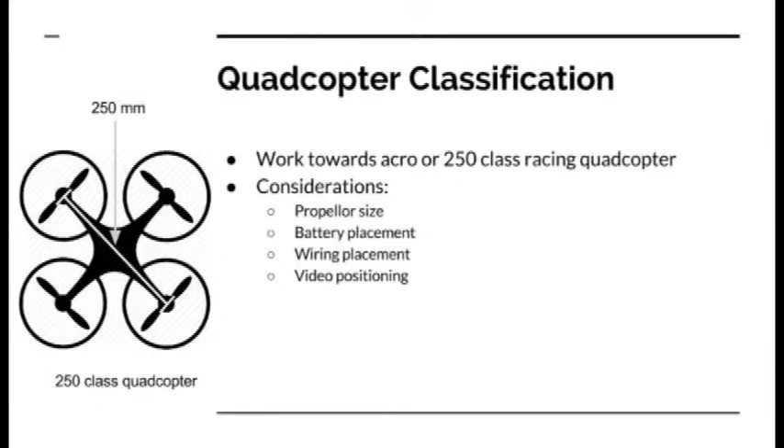We're going to be working on building an acro or a 250 class racing quad, because I think a very cool thing would be to have all of you guys have your own 250 class racing quads, and we can make our own FPV league through the Robotics Club. So a racing league, we can hopefully get sponsors, hopefully get courses that we can go on.

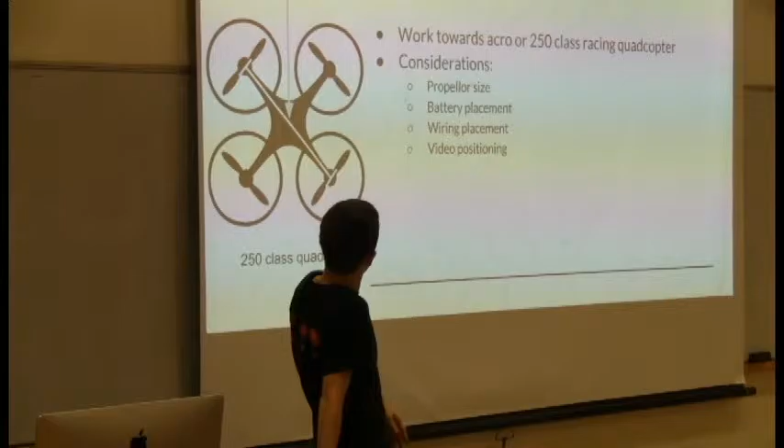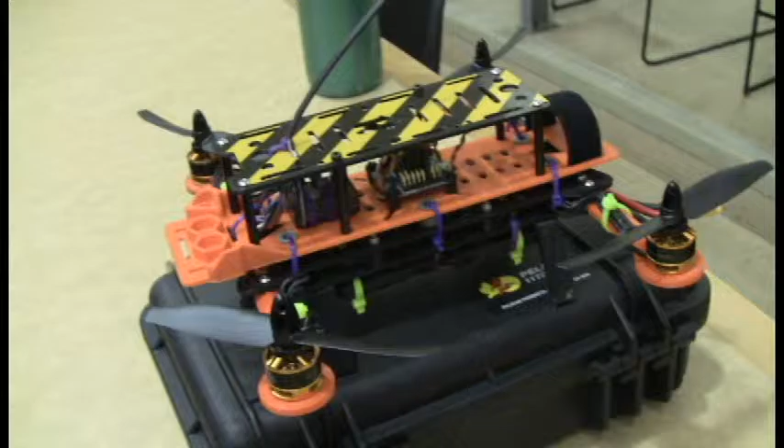That's the goal. A 250 class racing quad is defined as 250 millimeters across the diagonal from motor to motor. So that one, the orange one right there, you want to hold that one up? That's a quad Carl designed. He built it for about $200, and that is what a 250 class quad is.

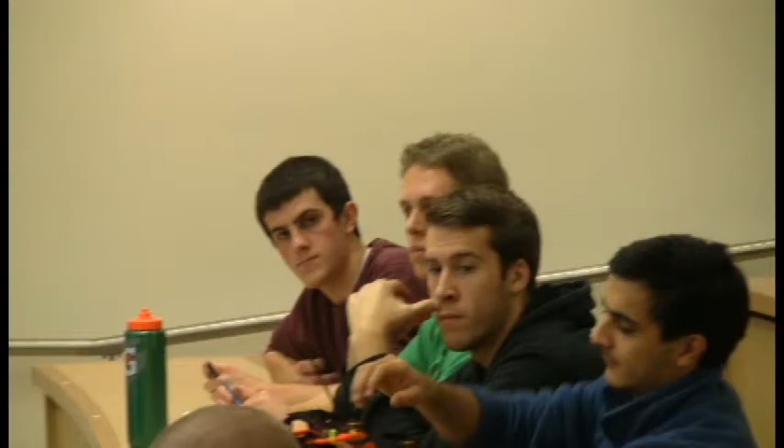They're going to be light, and they might not have as much power as, say, the octocopter over there, but they probably can get up and go.

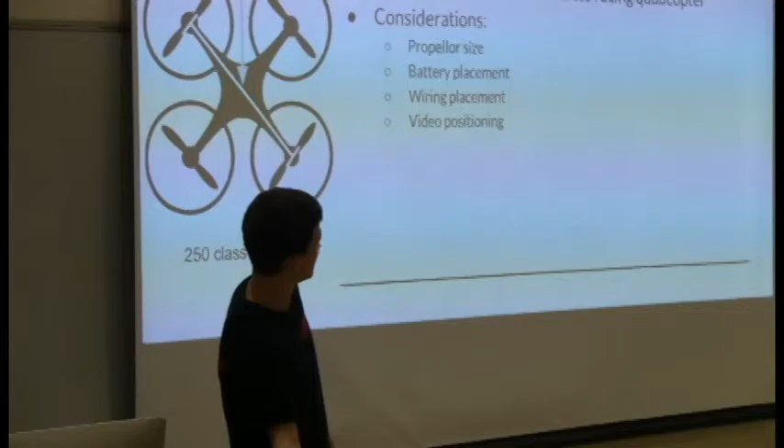Considerations you want to take into mind when you're building a frame: you want to take in mind how big your propellers are going to be. Those ones, Carl, what size are yours? 5-inch. So he has 5-inch propellers.

One of the mega quads we have in the club is 16-inch propellers. So you really need to consider what you're dealing with, what kind of beast you're dealing with.

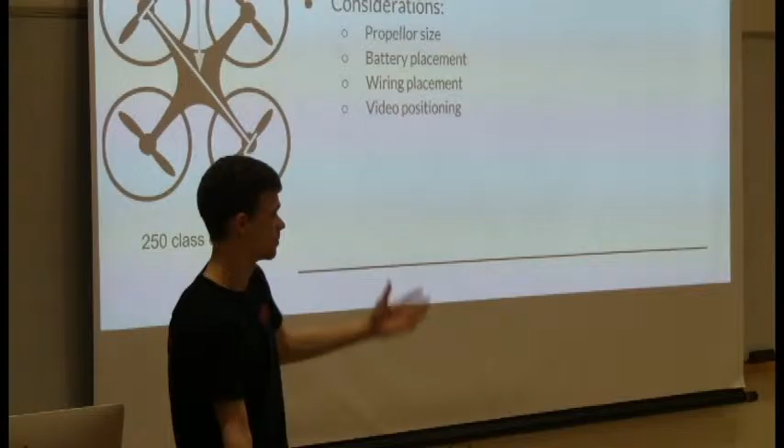Also, battery placement. Batteries tend to take up a lot of space, and you really have to make sure you know where your battery is going before you just make some random quadcopter on SolidWorks and print it out, and then have no idea where everything's going.

Wiring is a big thing. If you look at the octocopter in the front, you can see all of the wires are braided into the center, so that they don't get in the way of the spinning motors, and they don't get in the way of any other moving parts, so they don't get cut or any motors don't go out.

So you really want to take into account wiring placement. As an ME myself, usually I don't think of that because I'm building a frame, and it's brought me into some sticky situations before, so that's a big thing.

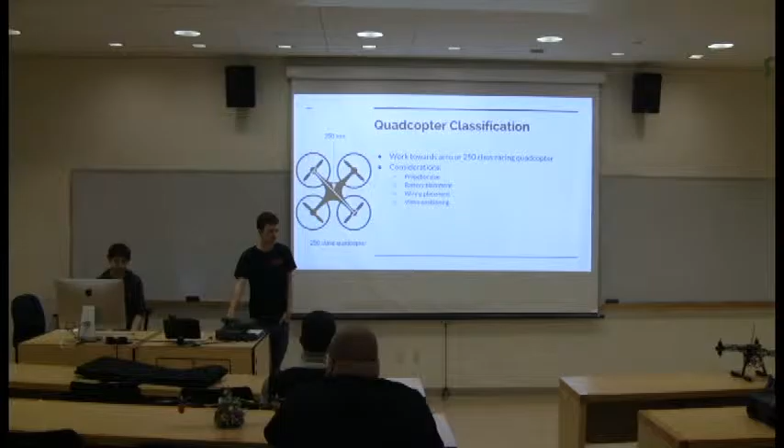And then also video positioning, where you want your video recorder when you're doing FPV, so that you can see everything in front of you and get a wide field of view. We'll also go into if you want to have it on a servo, so you can actually adjust the angle that you're seeing. Next slide.

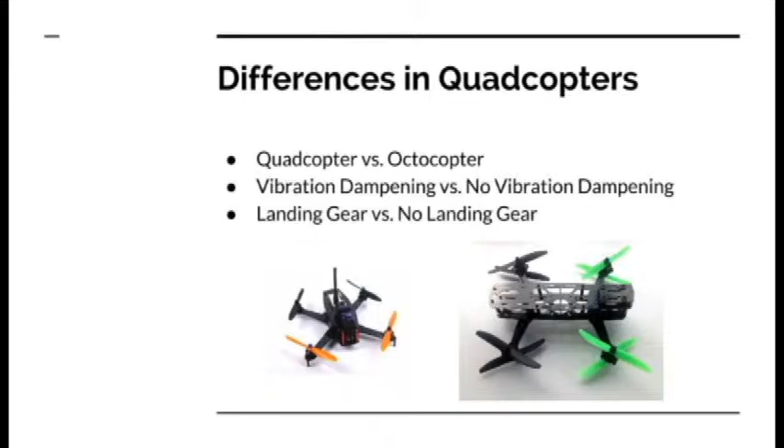So differences in racing quads: you can have a quadcopter or an octocopter. Those are typically the two types you're going with. A quadcopter is all the ones you kind of see in front of you for the most part, 4 rotors. The one that's in front of Josh and Sam, that's the octocopter.

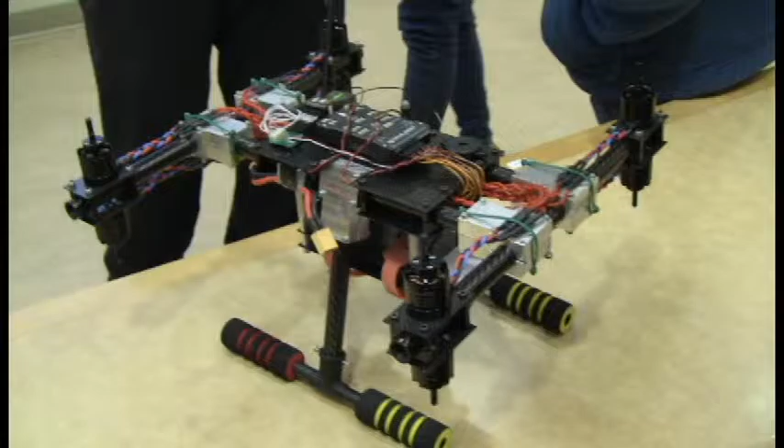If you look at it, it doesn't have the blades on it because it's going through some tuning right now, but it has motors on top and bottom. Really what you get from an octocopter is a lot more thrust, a lot more power, so you're going faster.

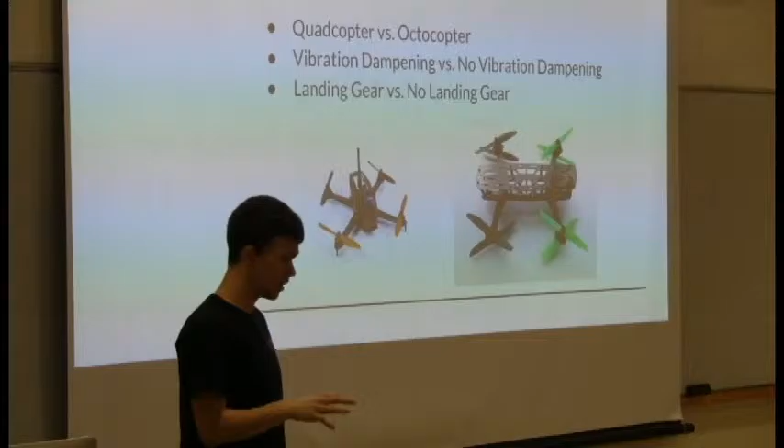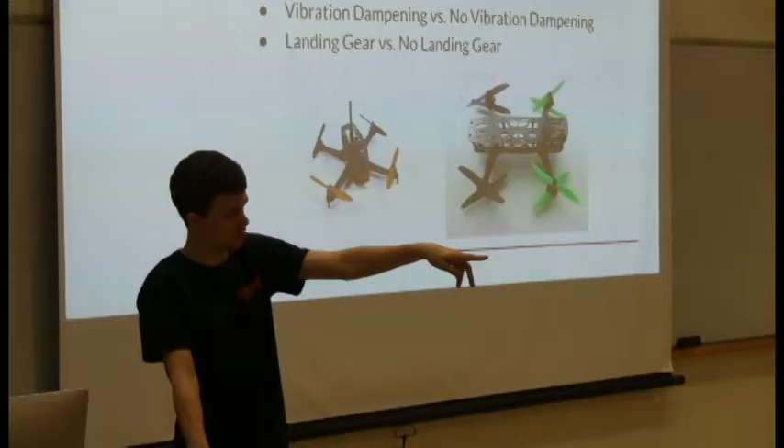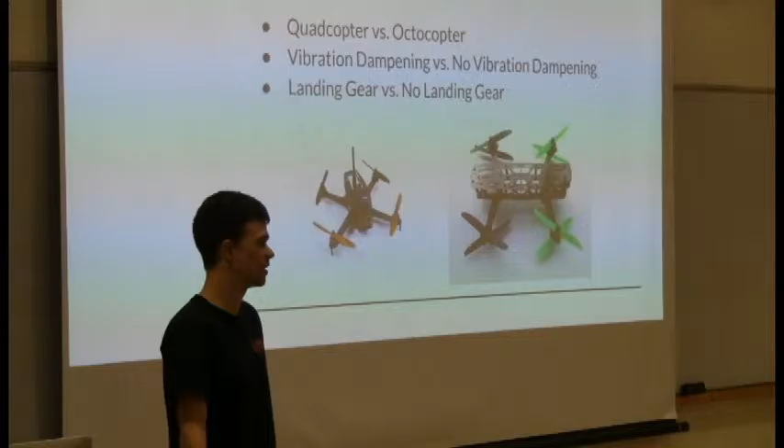But the trade-off is lower battery life, and it's expensive. Motors are a big investment when you're going into quads. The orange one, those motors cost about $60 for the 4 of them, so you're looking at about $15 per motor. If you go to octocopter, you're looking at a $60 increase. So really, one of the main themes you're going to see is you can do it, it's just going to cost you more money. That's really the thing, because there's a lot of off-the-shelf things you can buy.

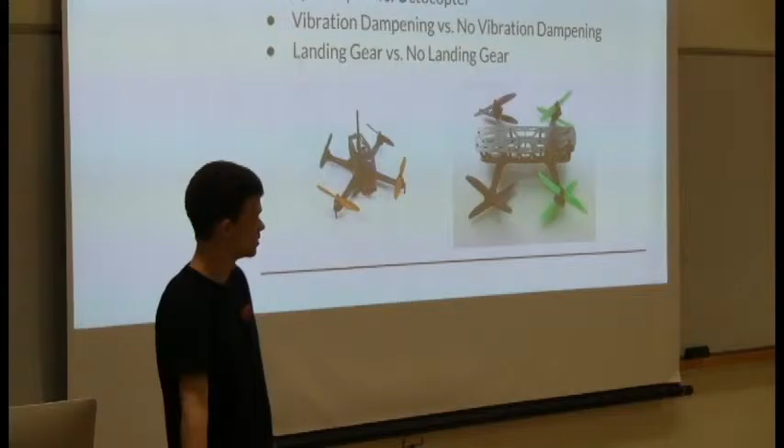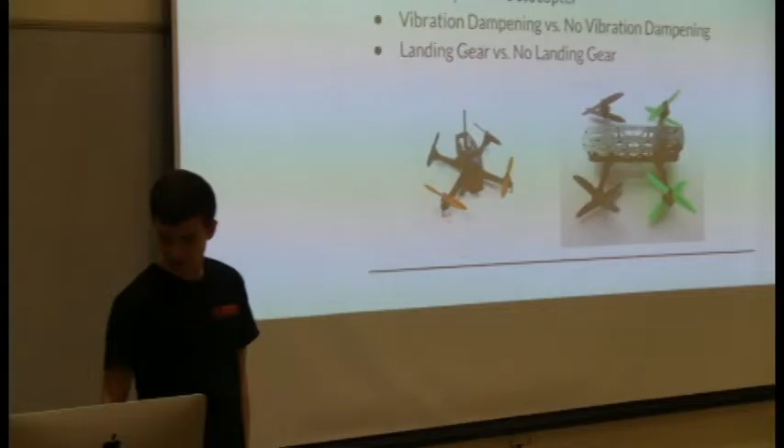The vibration dampening. Yeah, do you have a question? If we're going to race these, are we going to have two different leagues, a quad league and an octo league? Everything's in the same class. It's 250 class, right? Yeah.

So everything actually, the racing isn't a huge thing, but it's actually fairly new. It hasn't existed except for the last year or two because the technology hasn't existed. So everything exists in the same thing. The power trade-offs for having less battery life usually end up being equivalent, one half dozen of the other. It's more complex, obviously, to build an octorotor, but you trade that for more power with less battery life. Sometimes when you're racing, you need more battery life, so you get a bigger battery, and that weight is actually a trade-off between extra thrust because you're adding weight to the actual quad itself.

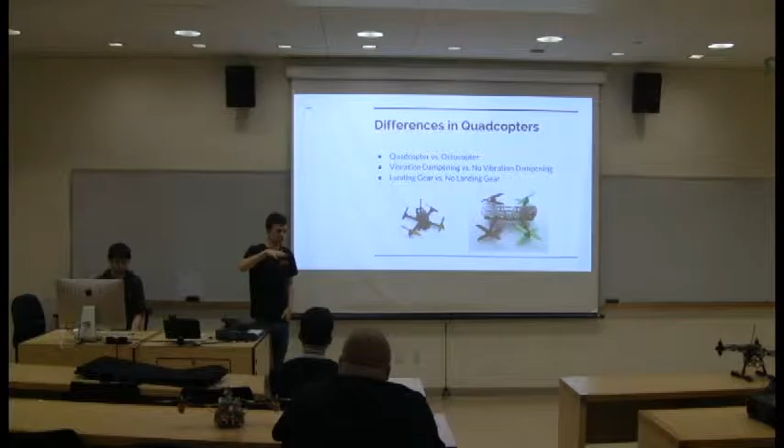Okay, cool, thanks. So vibration dampening - all these are flight controllers, and that's what flies the quad. That's what sends the signal to the motor, the ESC, to make them spin up. And when you're flying, and those rotors are spinning at really high RPMs, that flight controller experiences a lot of vibrations, and sometimes that'll tell it that it's not stable, or something to that effect.

So I'm going to keep pointing at the orange one because that's the kind of thing we're looking at. It has a vibration dampening plate, so if you want to just tap on the top of it very lightly, it has little vibration dampeners along it. You can do that, but also, Levi, you want to take note of what happens if you don't dampen it? As far as flight control? Basically, it just makes it harder for the sensor to record what's going on with the levels, and the levels are bouncing all over the place. So you lose a lot of the control, I guess, but you're still able to fly if you don't dampen it.

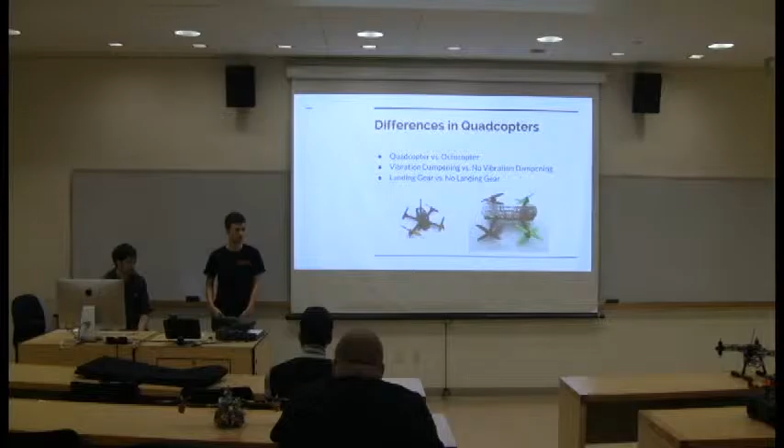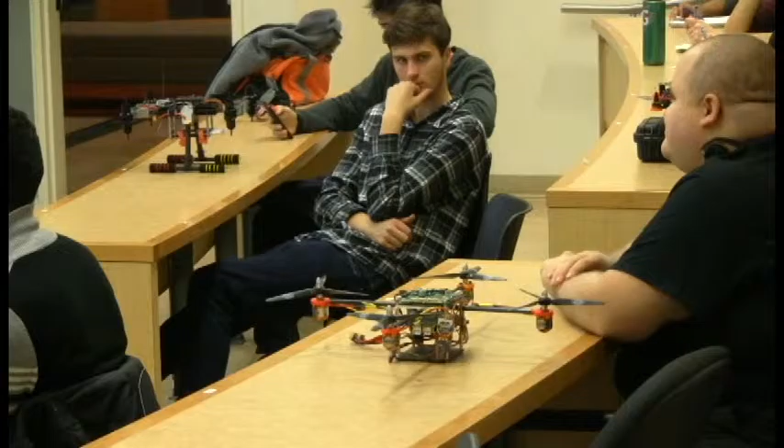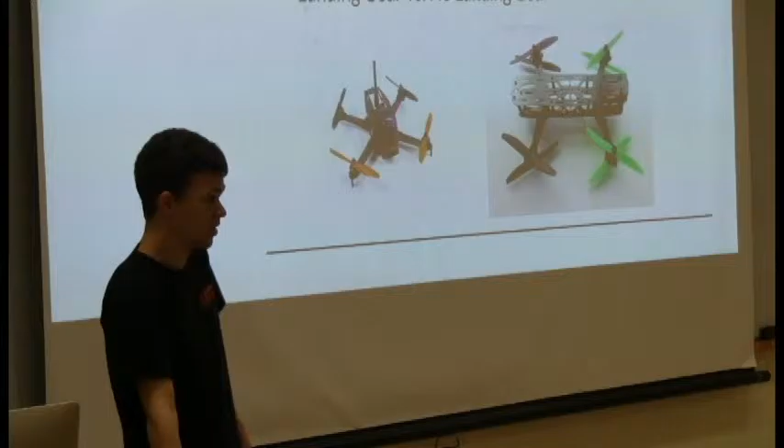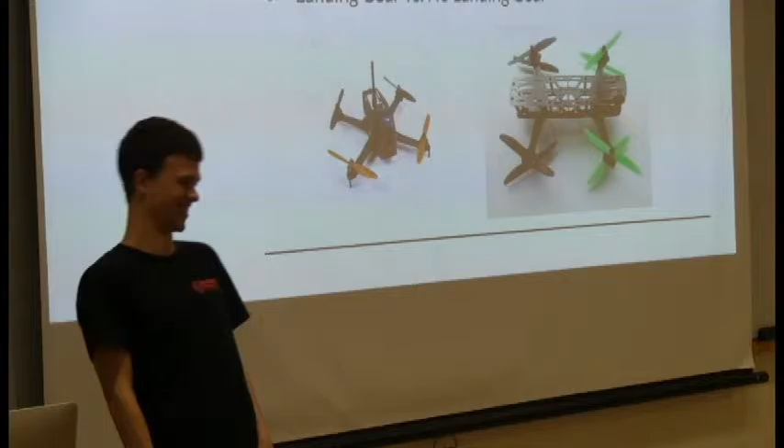And then also landing gear. I'm going to point you to this one over here. This has no landing gear. All you're doing is a long landing every time you land. The benefit of that is you're doing a racing quad - you're not really wanting to land it, right? You're trying to get around a course as fast as possible. So you might decide you don't need landing gear. Whereas if you look at the octa quad, they have the little 4-prong landing gear so that when you take it down for landing, you might not break any of the equipment. So when you're building your frame, you should consider: do I want landing gear, do I not want landing gear? What are the trade-offs if I decide not to have landing gear and I'm just bottom landing it every single time? Because I've seen that one flip a lot of times, and we've broken a lot of stuff on it because of that. But it's not also meant to race, so there's that.

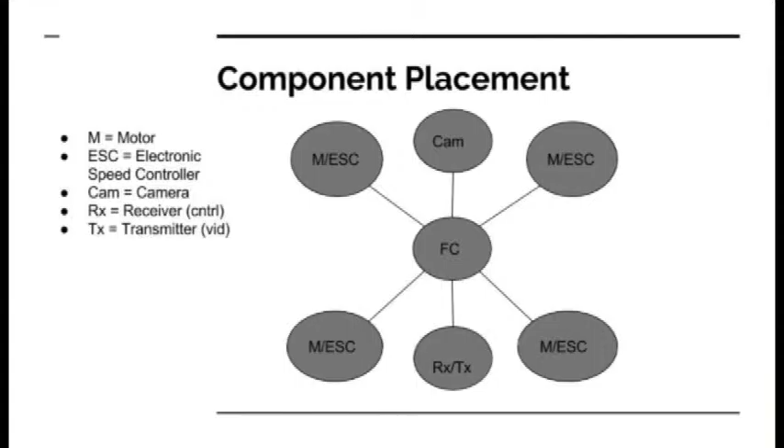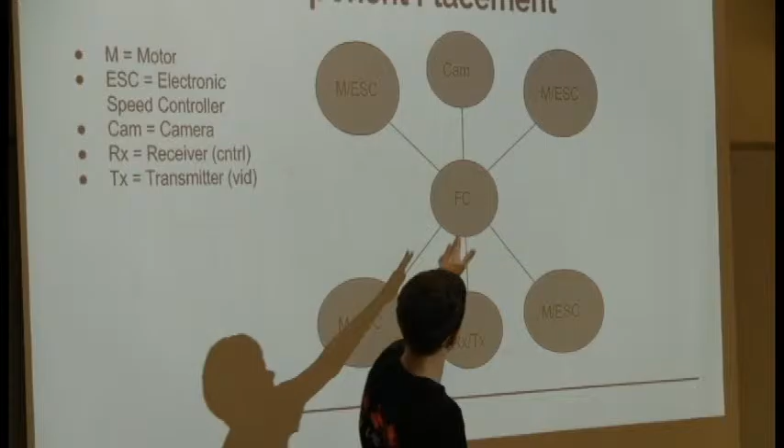Next slide. So then component placement. When you're designing your quad, you want to think about where all the components are going. I'm going to send out these PowerPoints over the members list, so you'll have these PowerPoints. This is basically all the main components you're going to be looking at. You're going to have your motors - this is your main center computer, the flight controller. Then it's going to go off to your 4 motors and your 4 ESCs. Then you're going to have your camera in the front, looking forward, and then usually your radio receiver and your video transmitter in the back.

So when you're designing your own custom quad, if you want to do that, I suggest doing a similar component placement diagram where you put down your flight controller, where that's going to be, and where your 4 motors or 8 motors, 4 ESCs or 8 ESCs are going to be. Then put down where your camera is going to be, where your transmitters are going to be, and where your battery is going to be.

I didn't include that in this, so that you really know what you're dealing with when you're building your quad. That way you're not going to get everything printed or receive it online after spending $40, $50 on it, and realize it's not what you thought it was, that it doesn't have these certain components.

So this is a very good - Levi was saying this is how you start most of your quads, isn't it? Yeah, generally just bubble diagram it out where I'm going to put everything, so I plan before I put the hole in and everything. So yeah, this is a very good starting point, I'd say. Go to the next one, you want to take this? All right.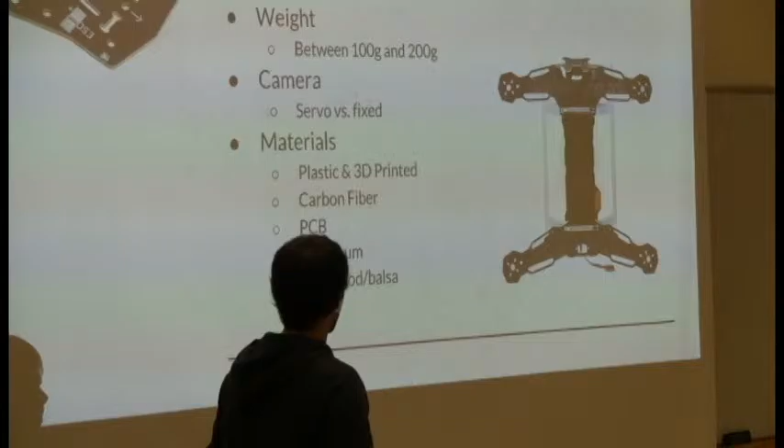Main thing to consider now is materials. You see we got the 5 main things that people are building out right now: plastic 3D printed, carbon fiber, PCB, which is pretty close to the same thing, aluminum, and then basswood and balsa.

And pros and cons of each of the different ones. Plastic 3D printed is inexpensive, most commercially available, got a lot of different replacement parts out there. Mid-range in weight and strength, and it's the only one that comes with a lot of flex, and that's usually a good thing when it comes to vibration dampening. So that's one thing to consider when you're looking into plastic or whatever.

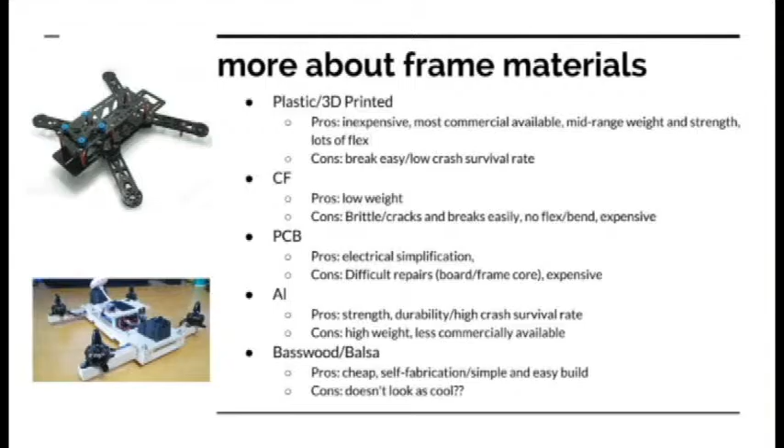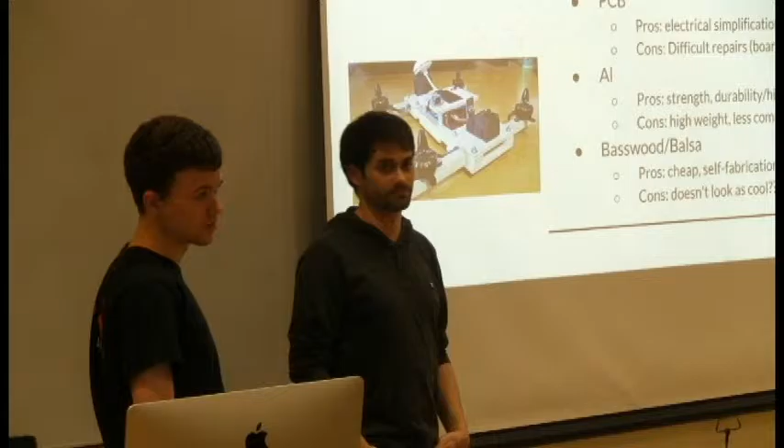Cons: breaks easy, low crash survival rate. I've crashed these things a lot of times, and the plastic ones snap right away. So the orange one over there, we were flying it a couple weeks ago, and someone flew it into a tree, and it fell down and broke 2 of those arms off. Carl has the model for that and just printed off two new arms and was able to use it to film some videos and stuff like a week later. So that's one of the benefits of doing a 3D printed frame - you can basically print your own replacement parts. You don't have to wait for more than a couple hours to get your stuff up and flying again.

Like those arms, you can 3D print at the library for about 50 cents, have about a day lead time. So if you break something, you're looking at getting back in there about a day for 50 cents, so it's not bad.

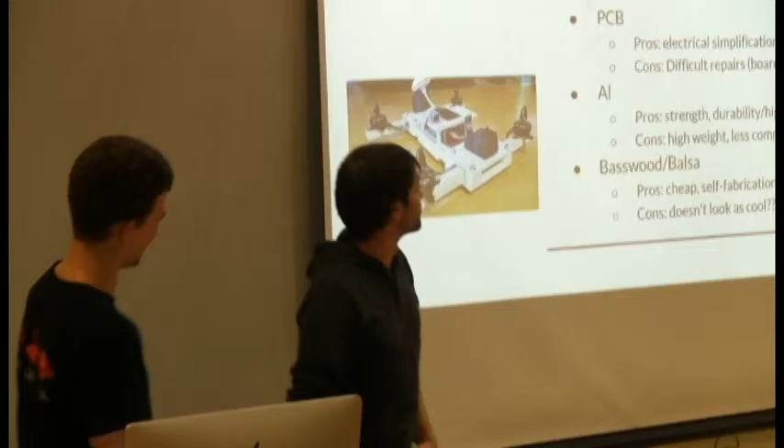Carbon fiber - low weight is the main pro of that one. Generally they make it thinner, so it's still a little bit brittle and breaks, and there's no flex really. Carbon fiber is usually expensive unless you're building it yourself. Like these frames, you buy them for like $20, but sometimes when you get carbon fiber, they run like 50 to 100.

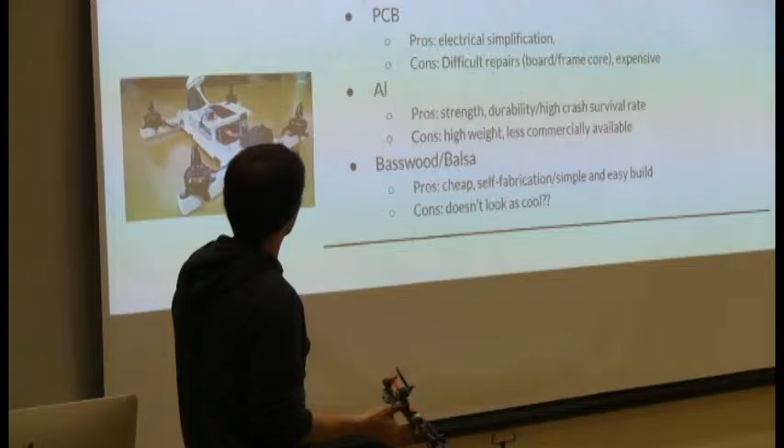So PCB, pretty much the same thing, it's electrically simple. One thing I would say is that they're difficult to repair. If you look at it, it's just one solid piece, and basically if anything breaks in here, the whole thing's trash. So just one thing to consider. But yeah, it's inexpensive - this one's like $12 for this frame, so it's not too bad.

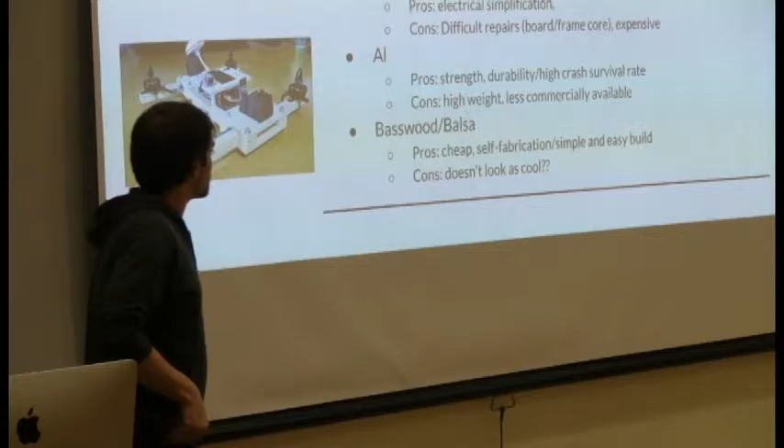Other than that, aluminum, there's not a whole lot out there. Basswood and balsa really is mostly just craft stuff, just a couple things out there in the market right now. Aluminum definitely is the strongest, but high weight.

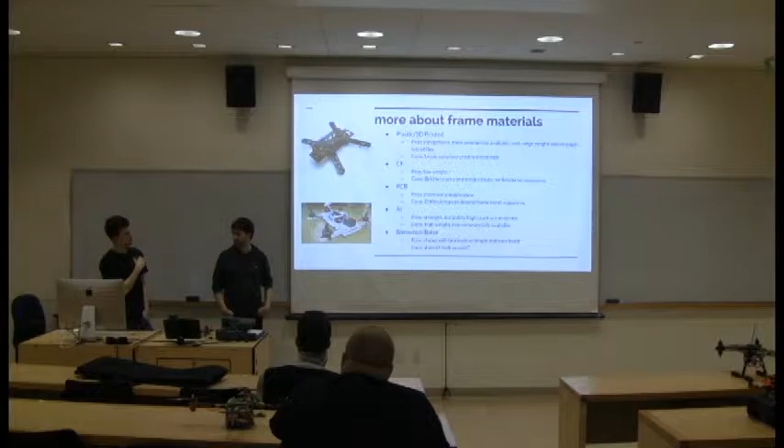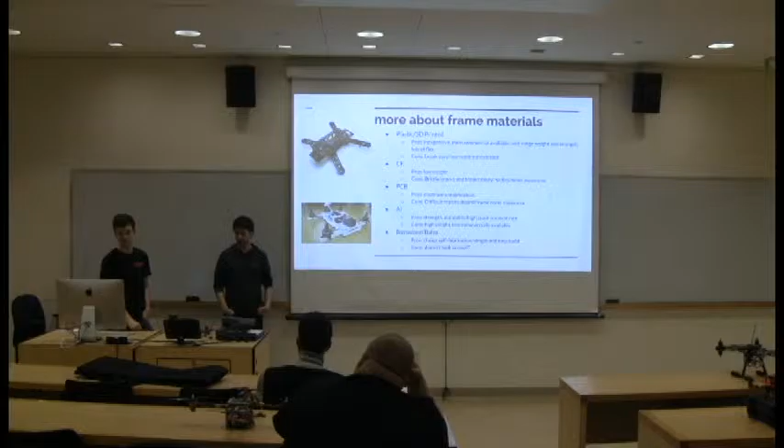Basswood, I recommend it personally, especially when you're starting out, just because you can build and experiment with it. This is basswood for probably like $2 a frame. Also in the robotics lab, we have a lot of wood components for building frames, so if you want to go in there and just start messing around, we have a lot that you can just split, glue together, and throw motors on. It's a kind of cool project.

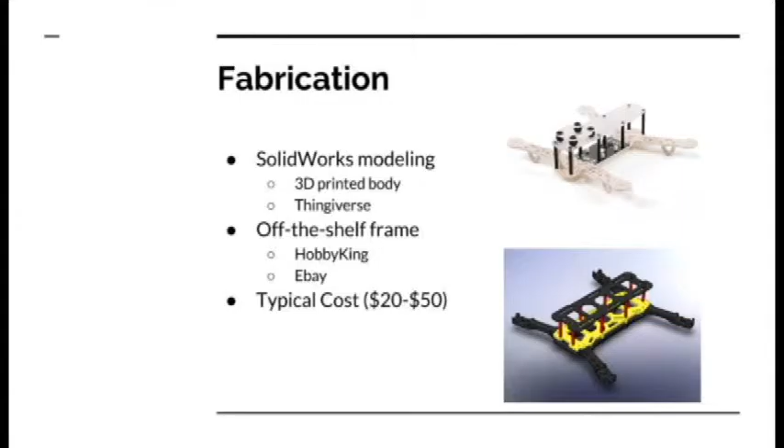So for fabrication, say you have a model that you made or something online, and you want to get the physical thing itself. If you go through SolidWorks, which all the engineering computers in Dearborn and Batcheller have, you can 3D model something and convert it to an STL file and send it to the library. We have some 3D printers in the box lab, but they usually don't work, so take that with a grain of salt. You can send it to the library instead - they have about a 2-day turnaround time, and it would cost about $20 to $25 to 3D print a frame like that one.

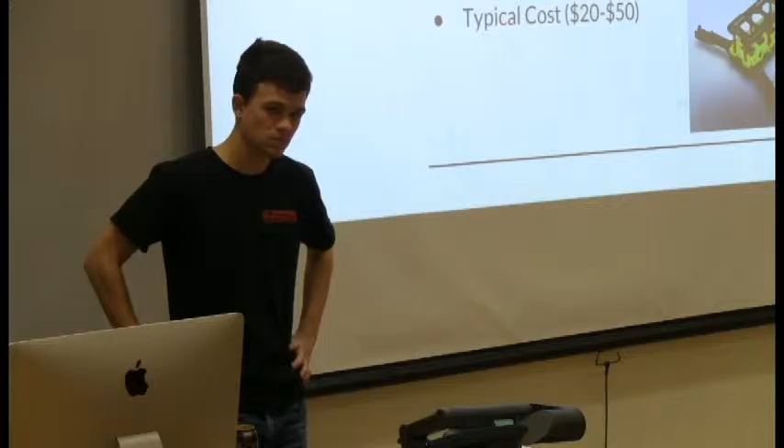Also, you can go on Thingiverse. If you don't have experience with SolidWorks or AutoCAD, you can go on Thingiverse and just download the files yourself. Thingiverse is essentially a big open source community that creates 3D models of things you can generally print or laser cut. That frame is available on Thingiverse for printing for free. There's a lot of people that create different styles of quadcopter frames and things, so all you have to do is go on the website and download a whole frame for free that someone else has designed.

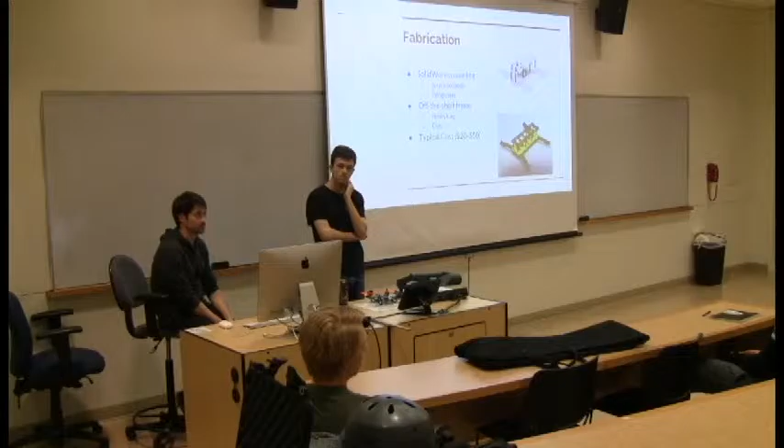That's pretty great. And then if you really don't want to go the route of modeling things, or don't want to go through the trouble of 3D printing at the library, you can get off-the-shelf frames. The cheapest ones you can get off Hobby King and eBay, and that's just up to your ability to search and find things.

How do you usually find frames online? Usually Hobby King, or eBay for cheaper. You can find them online and they'll cost - what was yours, $40? Yeah, that one was $40, but generally if you get a frame online it'll be $20 to $50.

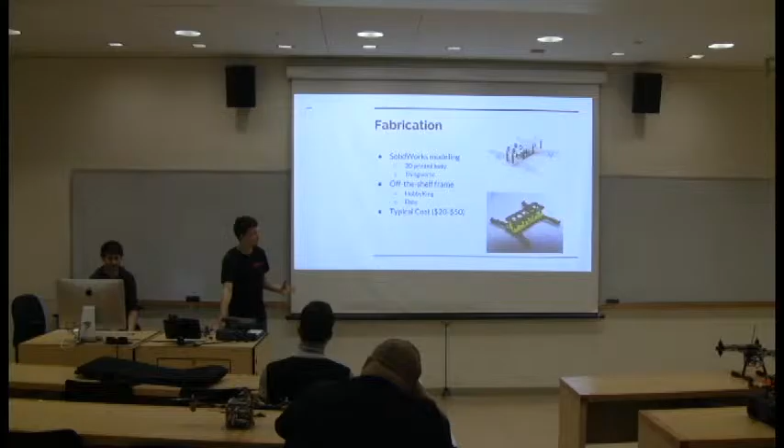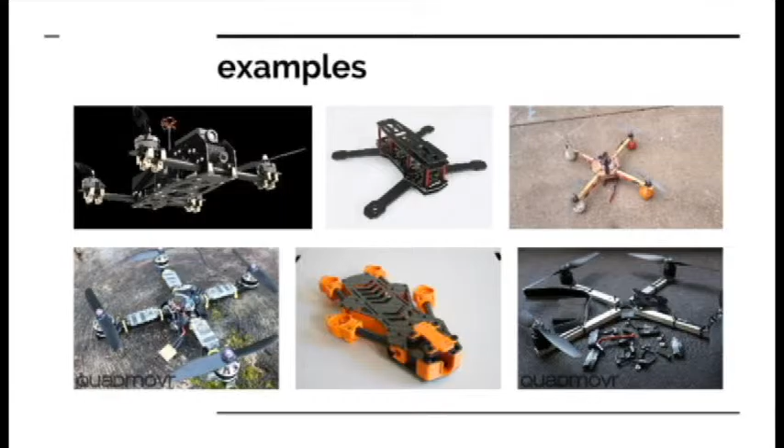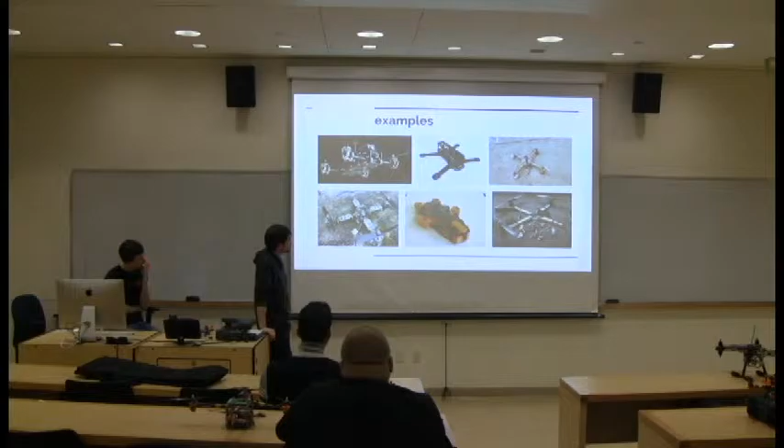And then you want to go through some examples. I just threw up some examples of the different types we've been talking about. This one's all carbon fiber, a PCB frame right there, and then this one's actually 3D printed - some guy made that online, found it on a forum, so it's a small example of something you can build with the library printer. This guy here, you might have seen it online - it's the QuadMovr, an example of aluminum.

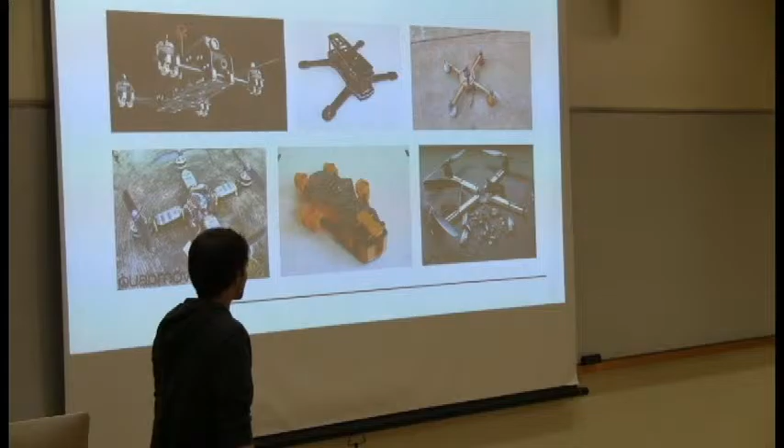One thing I didn't mention earlier is if you're building something more powerful, you might want to go with aluminum, just because plastics can flex a lot, especially when you put something capable of going like 90 miles per hour on it. That's the main thing - if you're going for more strength and power, definitely lean towards aluminum. And just a simple, basic wood frame if you just want to experiment.

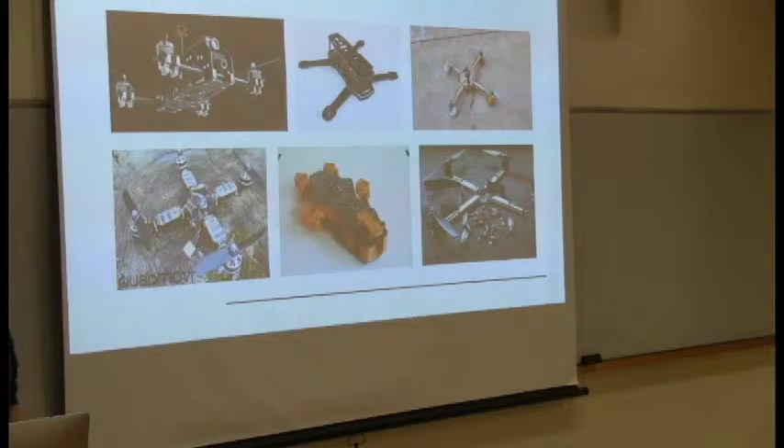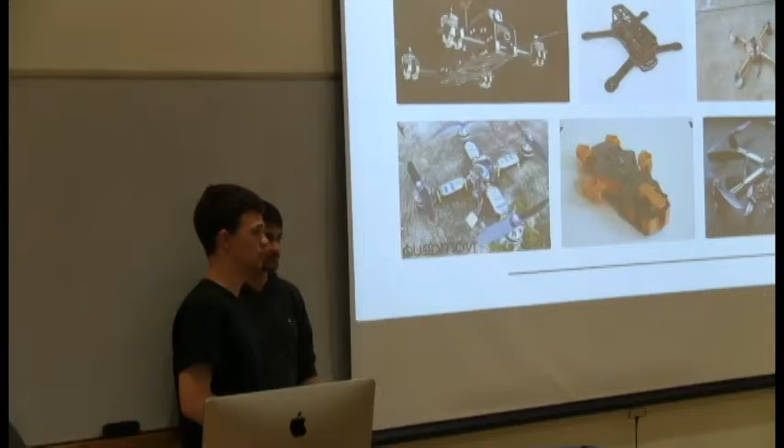So that's really all we've got on frames. Now we'll open up for any questions. So if there's anything we said that you didn't get, or if you have questions, I'm sure other people have the same questions. So is there anything you've got now?

Would you be able to model an aluminum frame at all?

You could model an aluminum frame, but you don't have the capability of making anything. So on this quad, all of these connectors are made out of aluminum. We modeled those in SolidWorks, and then Carl and I took down the drawings and fabricated those in the machine shop out of stock aluminum.

So you can model out of aluminum, and then if you have machine shop clearance, you can fabricate yourself. But you really have to take into account, am I going to be able to mill this on a manual mill? Or if you've got clearance for the CNC, then maybe you can be a little more imaginative, but it's really based on your skill and your clearance.

Plus the time it takes too. Those took us, we probably put 20 hours into just those basic parts alone. So it takes, it's a process, but you can do it. And if you really want to work on your manual milling skill, it's fun.

How do you get to use the CNC? So the first step is taking ME 250, which is the machine shop class. A lot of the times, if you've got machine shop experience or you need it for a club - if you're in robotics and you want to build aluminum stuff here and you're part of the robotics club, you can get ME 250 clearance. It's a 1-credit class, it's a bit of work, but you get to learn the machine shop. After you do that, that'll give you manual machining access essentially.

Then you have to go and take a seminar essentially on CNC and then get certified in that. So it's a bit of a process to get CNC certification. Typically the seminars are about 3-day-long classes, so Brian Jensen typically doesn't like a lot of people having it, so they're typically Thursday, Friday, Saturday of the end of finals week. So those are usually when the seminars are - I've never been able to make them. But if you're around Thursday, Friday, Saturday, that's when he offers them. So that's how you get CNC clearance.

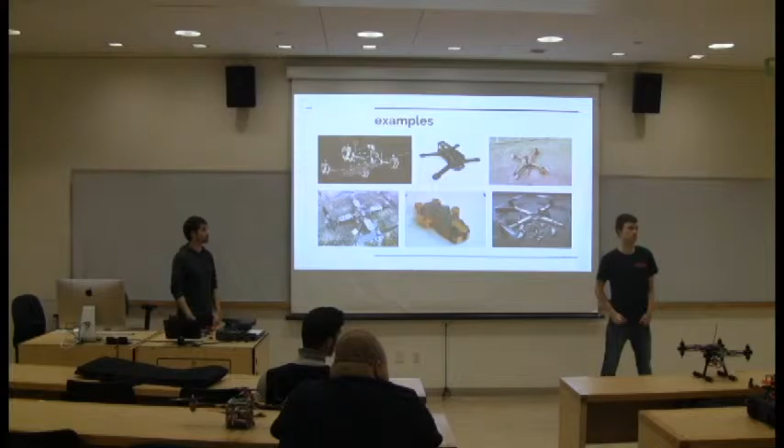If you're in the robotics club and you need it for a club, which if you're here, you'll need it - you can say I'm building a quadcopter for the robotics club, that's super easy to get. It's a time commitment, it's not like, here you go. It is difficult, it's like a class - 25 hours of outside work. It's a lot, but it's worth it.

Any other questions? Quadcopters, frame design, terminology - we throw a lot of like FPV and PCB, lots of acronyms in this world. Anything? Okay, so that's frame design.